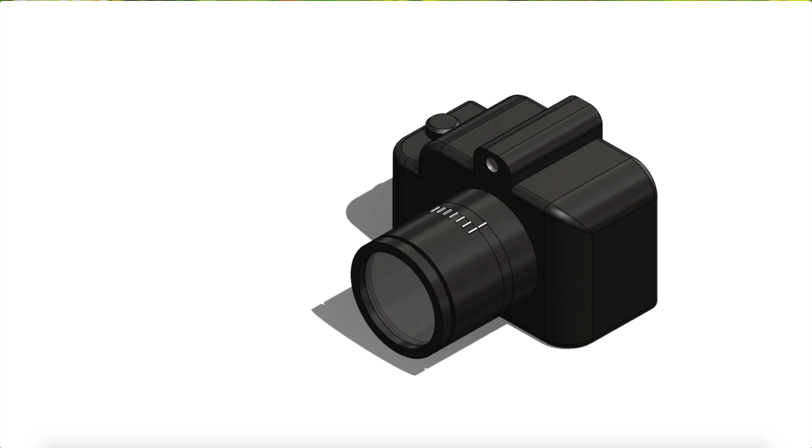For our mechanism description, we chose a camera's iris diaphragm. This small circular mechanism can expand and contract a hole at its center, known as the aperture. The iris is one of several mechanisms that help control the exposure, or how much light reaches the camera's receiver.

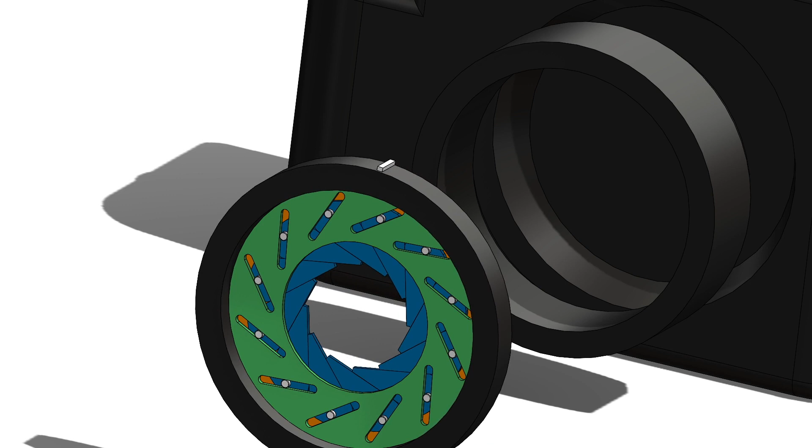The iris also helps focus light, which determines the depth of field of an image, or how far away an image can be in focus. This mechanism has thin, small blades that are held together with pins and an outer ring. When a dial on a camera lens is turned, the blades expand or contract, allowing more or less light in, respectively, modifying the exposure and focus.

Suppose you want to take a picture of your dog in front of Brookings Hall at noon. Completely opening the iris maximizes the amount of light entering, producing a bright, washed-out image. Light from objects close to the camera, like the dog, hits the receiver in a straighter path, so the object is in focus. However, light from objects farther away hits the receiver at more angles, so they are blurry.

Closing the iris halfway reduces how much light enters, so the image is darker. By reducing the size of the aperture, there are now fewer angles at which light can enter, bringing objects farther away into focus. Closing the iris entirely lets little light in, producing a darker image. This focuses the light best though, so the entire setting is in focus.

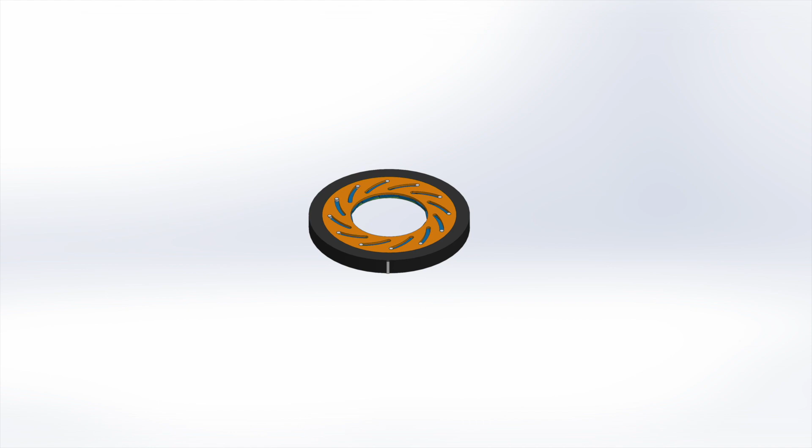This mechanism has four main components, each made of plastic. First, we have the blades, small, thin, triangular-shaped pieces. This shape allows them to fit snugly in a circular pattern and slide along next to each other when assembled. The purpose of these blades is to create an opaque barrier against light and vary the size of the aperture.

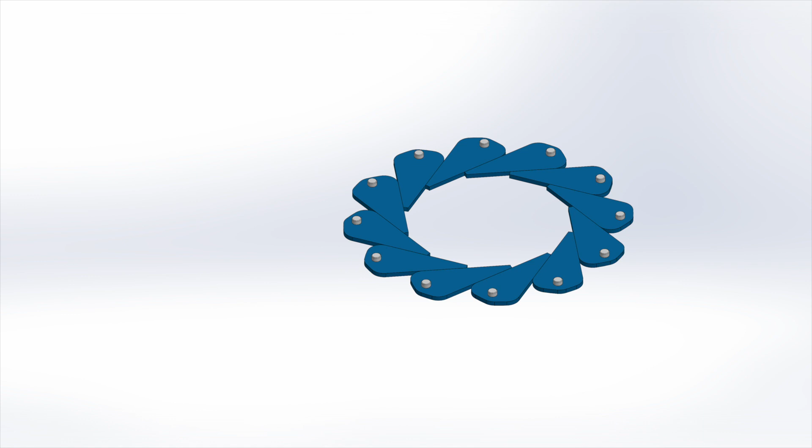A small pin is inserted into each blade, which interacts with two plates and guides the motion of the blades. Although it may appear they follow a spiraling motion, the blades actually move in straight line paths. Next, we have the two outer plates, the base plate in green and the drive plate in orange. The base remains stationary while the drive rotates.

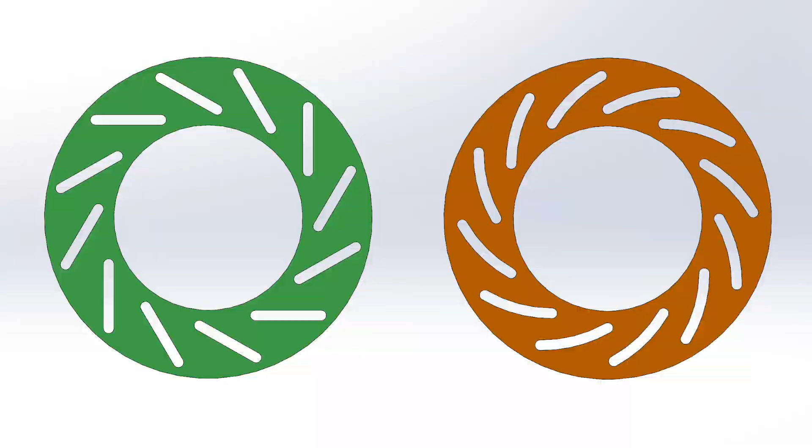Slots are cut into each to guide the pins attached to the blades to move through a predetermined path. Rotating the drive plate pushes the pins, creating the movement in the blades. The drive plate has curved slots to accommodate its rotation. These pin paths are designed so that the blades will adjust their aperture to a range of diameters.

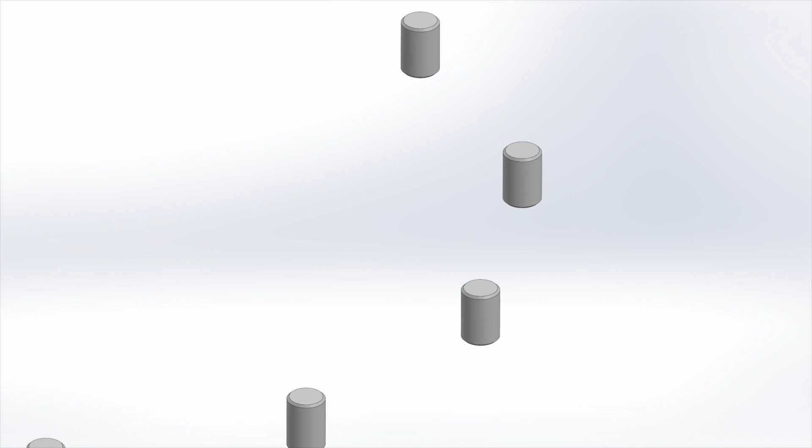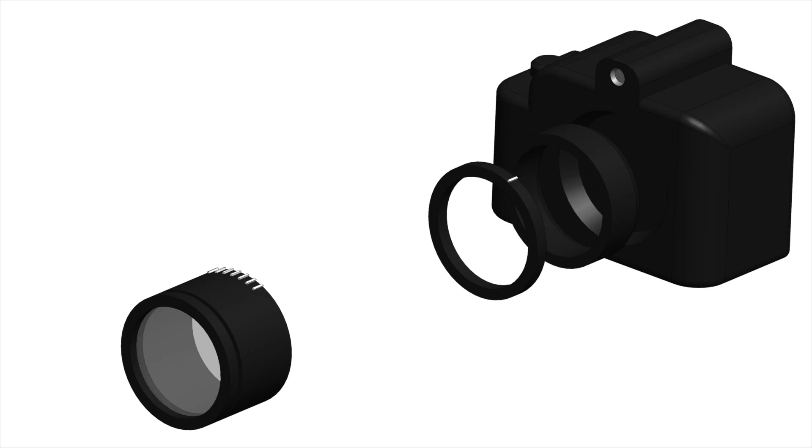The next part we have are the pins, which hold everything together. These are all cylindrical in shape and fit snugly into pinholes on the face of the blades, while also sliding freely through the slots on the outer plates. The last part we have is an outer dial, which connects to the drive plate. This dial is actually built into the camera lens and is the only part that the user directly interacts with, allowing them to adjust the size of the aperture.

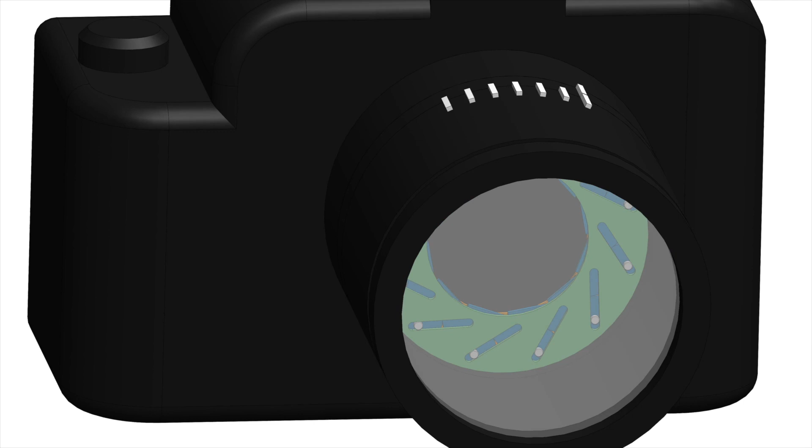Most modern camera apertures range from f/1.4 as the largest opening to f/8.0 as the smallest opening. These notches are referred to as f-numbers, which in technical terms refers to the ratio of focal length to aperture diameter. Operating a camera's iris is very easy. The dial of the mechanism is built into the outside of the lens. When you're holding the camera, simply grasp anywhere on the dial and rotate right or left. The dial can be aligned with stationary numbers on the lens, which indicate how wide the aperture is.

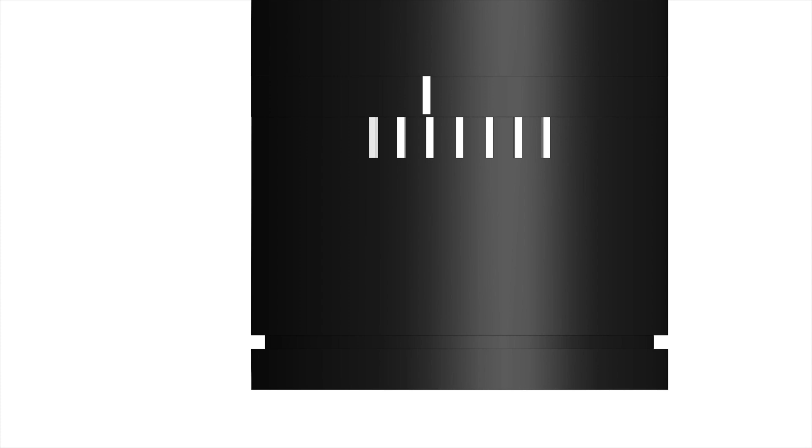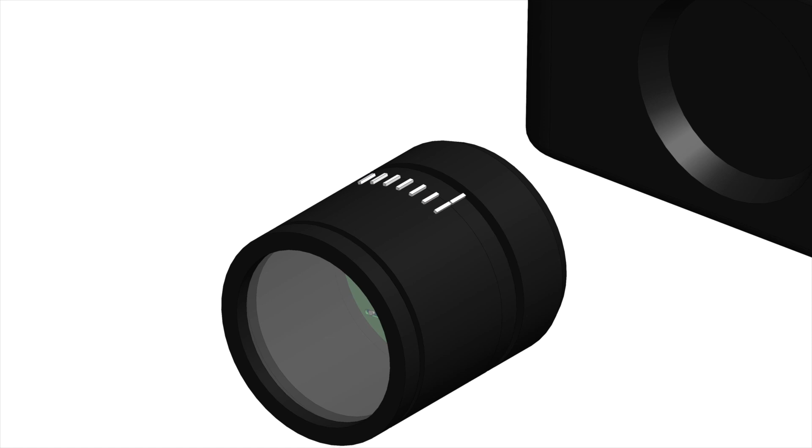The iris diaphragm is a clever, versatile mechanism that has been redesigned for a variety of specifications. In some, the shape of the blades is changed so the aperture can close entirely. In others, overlapping blades with smaller cross-sections allow for a smaller diameter device.

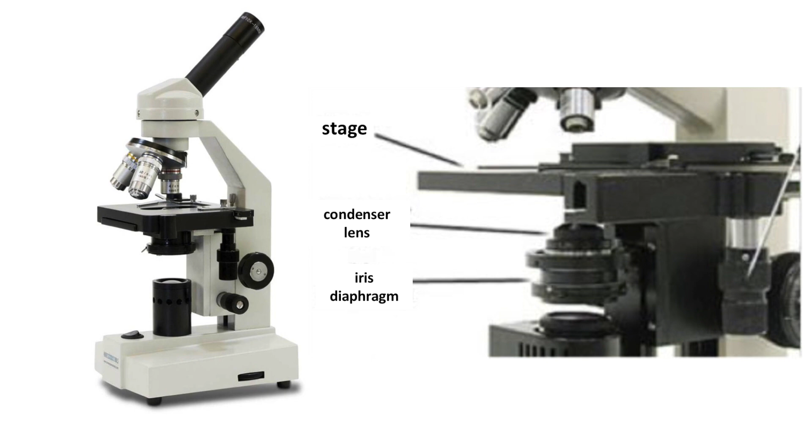In many modern cameras, a photographer simply selects the desired aperture on a screen and a motor rotates the iris. Irises are essential optical tools used in a variety of devices, from cameras to microscopes to telescopes, but the underlying mechanism is always the same.